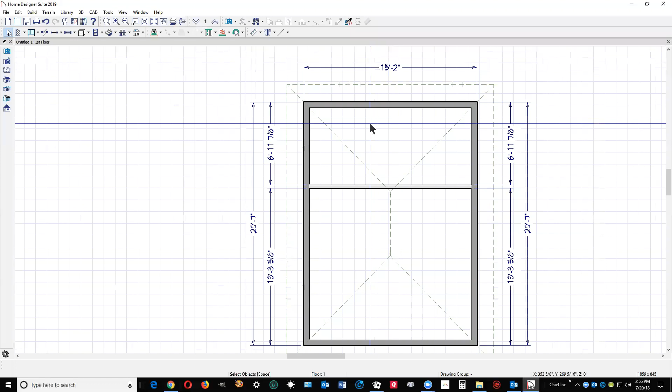Okay, hi. I got my copy of Home Designer Suite 2019 open. I just drew a little simple box here with an interior wall.

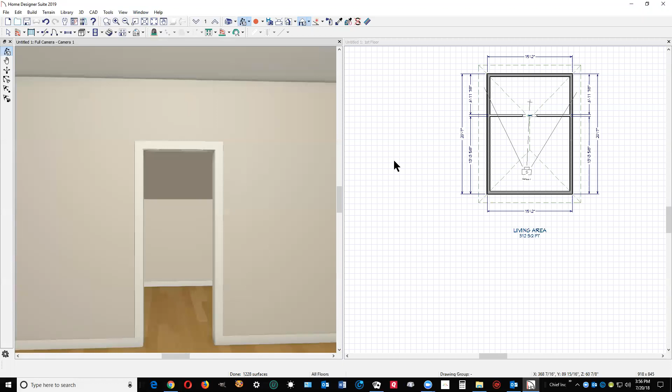I'm going to get a doorway and put it over here in this wall. Let's do a camera view of it. Okay, I'm going to hit the Shift F6 key so you can watch this in 3D and in plan view.

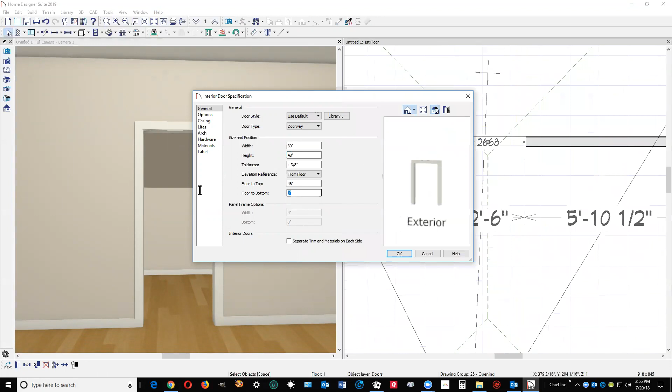And go back over to this screen, zoom in, open the dialog box. I'm going to make this 30 inches wide, that's fine. I'm going to make it 48 inches tall. Hit the tab key, put a floor to the bottom, and put that at 36. So now I've got a 30 inch by 48 inch hole in the wall, 36 inches from the floor.

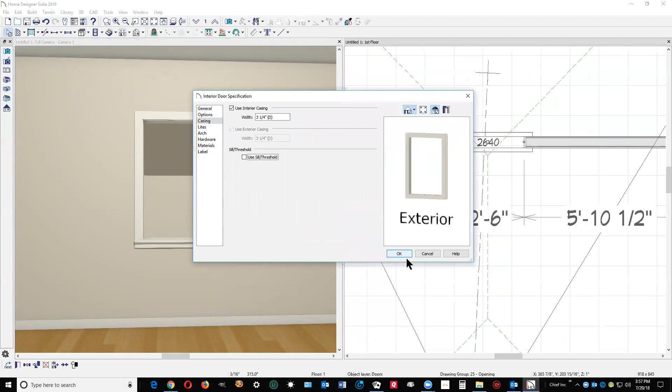Now, whoops, I'm going to open the dialog box in this window and get rid of the sill. I guess, well, if Suite can do that, I'm not sure. Oh, there it is. We'll just leave casing around the hole like that.

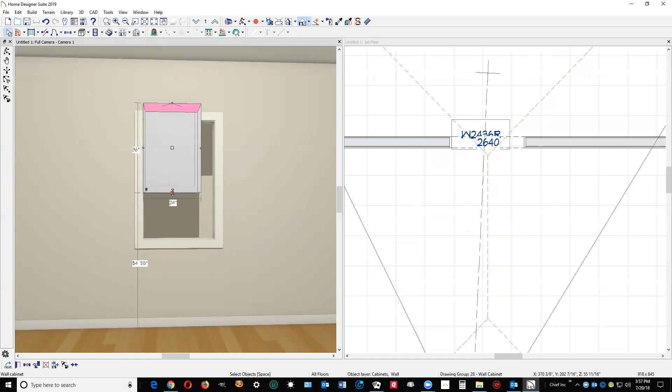Now I'm going to go over here to cabinet tools, wall cabinet, and stick a wall cabinet on the wall. Use the control key and put it in the hole. Now I'm going to line it up with the hole. I'll open the dialog box of this cabinet, make it 48 tall, 36 from the floor, and 30 inches wide.

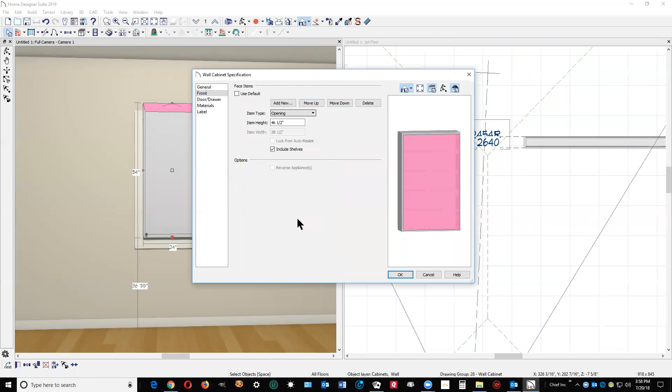Now I'm going to go over here to the front tab of the cabinet dialog, and we're going to select this area here. I don't want a door there, I want an opening. And there's your built-in shelf.

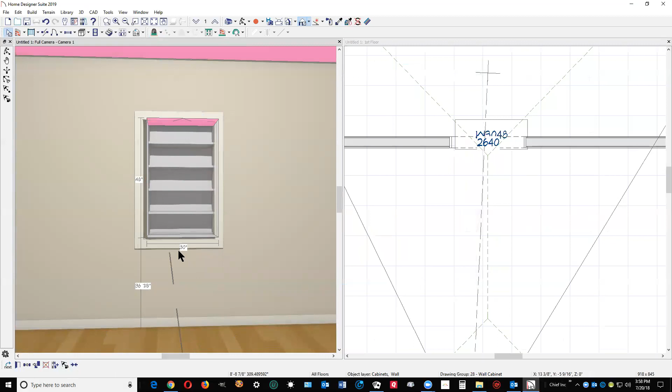So I need to line it up a little bit better. Let's see, I guess I need to make that 36 from the floor. And I'm going to take the centering tool and center it on that hole. Yeah, that's better. And voila.

So that's how I would do it in Suite. Now, as a designer, you're also going to have to figure out how to handle this space behind the wall and whatnot, but that's your problem.